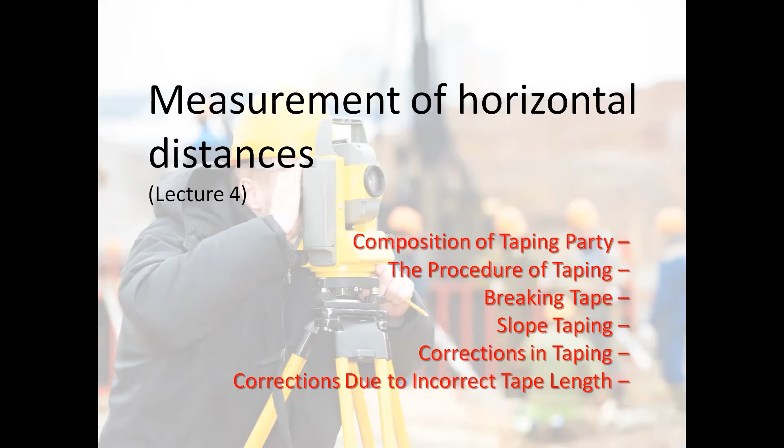So to review, the composition of the taping party are as follows. The head tapeman, the person responsible for the accuracy and speed of all linear measurements using the tape. Then the recorder, he keeps records of all the measurements, sketches, and observations taken during the process of measurement.

The flagman is the person whose duty is to hold the range pole at selected points, especially in traverse, in every corner where sightings can be taken; the flagman will serve as the target of the instrument man. Then we have the rear tapeman, the person whose duty is to assist the head tapeman during the taping operations.

So for the taping party, basically ito lang ang kailangan natin. But for a survey party, so marami yun. Na-discuss natin on the previous lecture. So we have the chief of party, etc., etc.

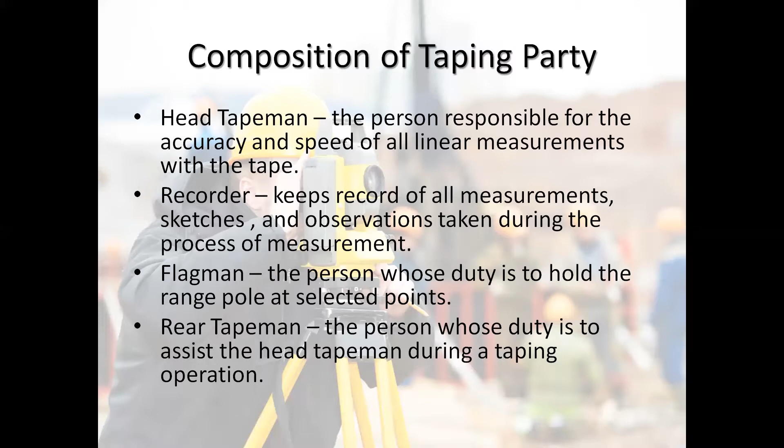So the procedure of taping. So basically, ito yung gagawin natin pag we are on field doing measurements. Aligning the tape. I-align natin ang tape according to the terrain. Then stretching the tape. Dapat the tape should be properly stretched. Hindi masyadong stretch, baka maputol ang tape. Ang hindi rin ganong maluwag, or at least can have a more accurate measurement.

Plumbing, this is done when you are measuring a tape held horizontally along a sloping area. Plumbing, or sa Bisaya, is pagtuntun. Maglagay ka ng tuntun so as to have an accurate measurement based on the end where the tape was broken. Then marking full tape lengths, tallying tape measurements, and then measuring fractional lengths.

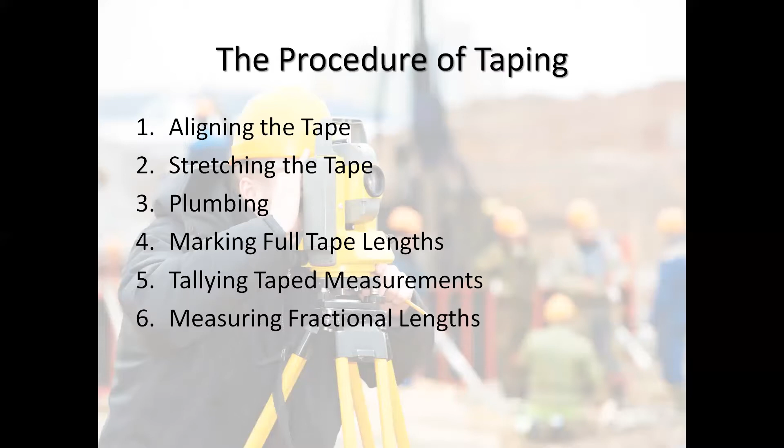You see fractional, you are not stretching the whole tape during the aligning, during measurements. So this is what we call the breaking tape method. Breaking tape, hindi ibig sabihin that we have to cut the tape, but basically to stretch out the tape based on the horizontal plane.

For example, this is the sloping terrain, and you are to measure the length from point A to point B. If you are going to align the tape along the terrain, what you are measuring is not the horizontal distance, but the slope distance. To measure horizontal distance, you can do breaking tape method or slope taping method, and later on convert it into corresponding horizontal distance. But for this discussion, we'll be using the breaking tape method.

So in breaking tape, ibig sabihin, iputol-putol natin yung tape based on the mark on the tape measured. For example, this is the direction of the taping party going down slope. So on the 30 mark of the tape, you are stretching the whole tape now. If you are using a tape that is 30 meters in length, you are already stretching out the tape towards the 30 meter mark.

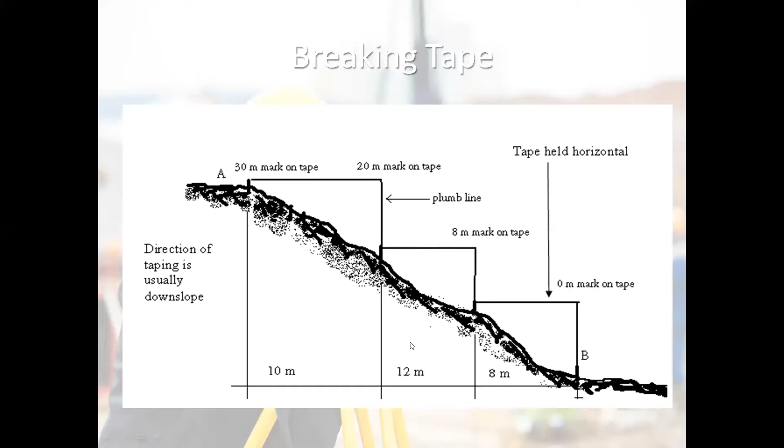Understood? Sa kanila, baliktad, ano? But pwede rin natin gamitin ganito. From 0, you measure towards the horizontal distance, then until kung ano lang ang kaya, then you record your reading. Pwede rin pabaliktad. But on the book, ganito yung ginagawa nila: from a 30-meter mark towards 0. And pwede rin gawin from 0 towards the 30-meter mark.

That's breaking tape method. For slope taping, I think we already have discussed this one. We simply have to convert the slope distance into horizontal distance by applying trigonometry. We have to determine the angle of inclination. So this can be done by using clinometer. You determine the angle and then measure the length from one point to this point along the terrain.

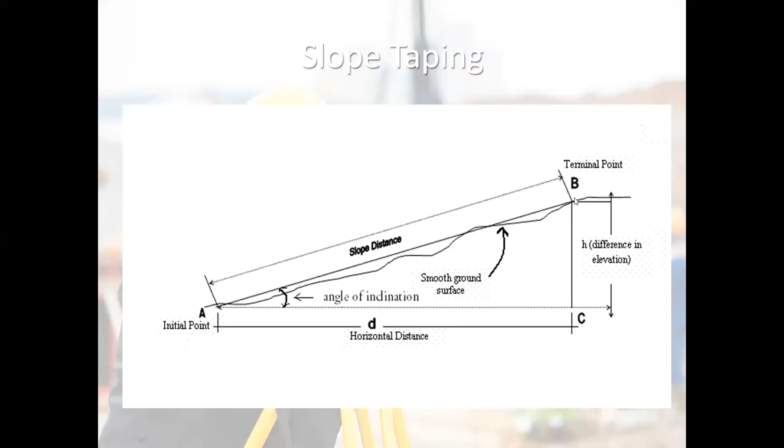For example, the measurement is made along a line that is inclined, a vertical angle of 15 degrees and 25 minutes as measured using handheld clinometer. Now, hand level and clinometer. The slope measurement is 756.52 meters, medyo mahaba. What is the corresponding horizontal distance?

Solution. So based on our previous discussion, the horizontal distance, or D, can be computed using the equation D is equal to S, which is the slope distance, multiplied by the cosine of the angle. If the inclination is given as an angle, you can solve it directly. 756 times the cosine of 15 degrees and 25 minutes.

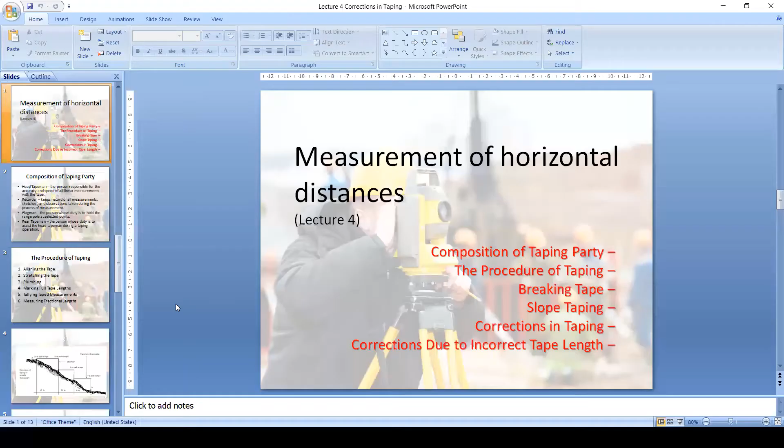So in your calculator, you enter, skip ko muna, 729. And then, stop share ko muna. And short video. So in your calculator, I hope you can see this one. Okay, let me check. Okay.

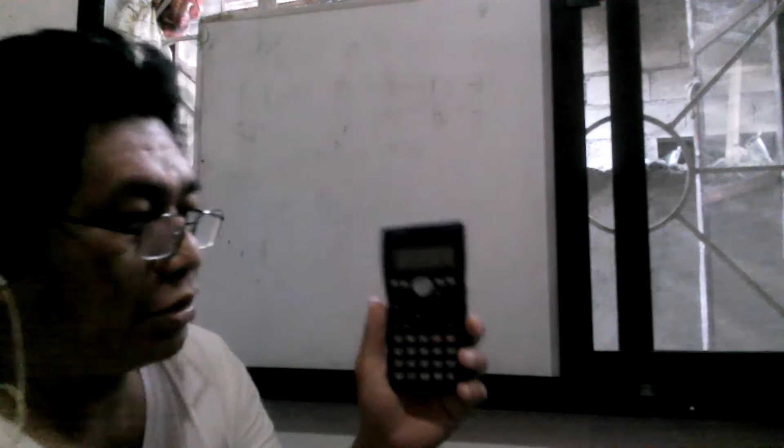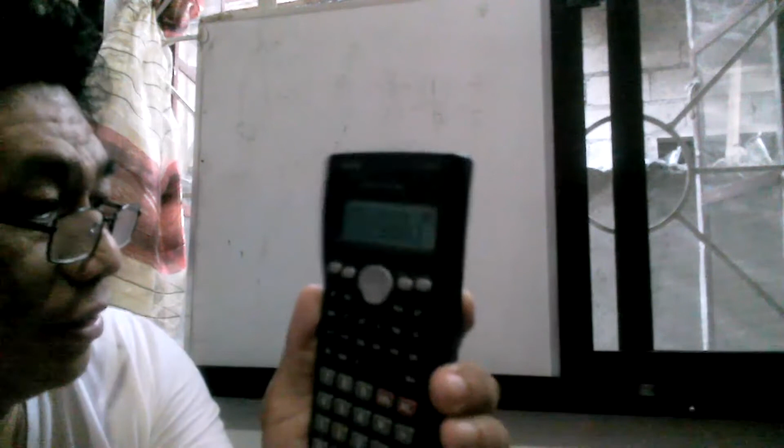So in your calculator, you enter the slope distance, 756.52, multiplied by the cosine of the angle, press 15 degrees and 25 minutes. Press the equal sign. This is 729. Let me see. It's not clear. 729.22 or 0.3. What's my answer here? 729.30 meters.

So, video muna. And then share again with the screen.

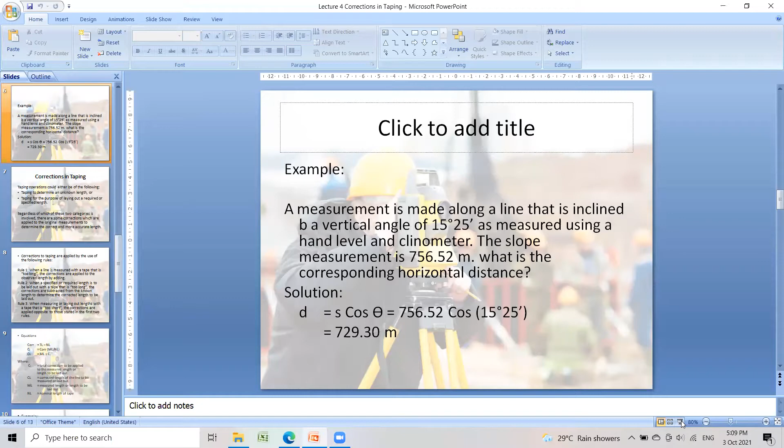So you can multiply it directly using a scientific calculator. As a reminder always, before answering the quizzes, you have to have your scientific calculator. Actually, on a face-to-face class, I do not allow the use of equations or formulas. You have to familiarize the equations. You have to memorize the formulas. But since this is online, we cannot really look into if you are memorizing the formula. At least be ready na lang.

Print all of these handouts before attempting a quiz. And in the quiz, I will allow you to use your handouts, provided that it is your own handout and you do the computations on your own, not depending on your classmates with the results, because at the end of the semester, you will learn nothing, no? Okay.

So I think we'll discuss na natin later on. And if ever the angle is given in terms of a slope, that is in percentage, 45% or 20%, you can use the equations provided based on our previous discussions. Convert that percent or slope into an angle before doing this equation. Understood? Okay, let me proceed.

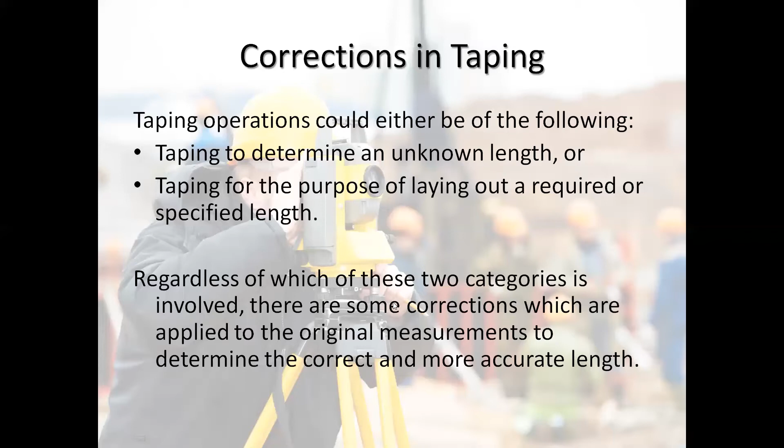The corrections to taping are applied by the use of the following rules. So we have 3 rules. When a line is measured with a tape that is too long, the corrections are applied to the observed length by adding. When a line is measured, you are determining with a tape that is too long.

When we say too long, you have a tape bought in a hardware, that's 30 meters. But if you compare that 30 meters with the standard invar tape or invariable tape, you found that the tape you have bought is longer than the standard tape. That is why it is too long. So the corrections are applied to the observed length by adding. You add your corrections based on your computations to your measured tape length.

For rule 2, when a specified or required length is to be laid out, i-laid out nimo, ibutang nimo on the ground with a tape that is too long, the corrections are subtracted from the known length to determine the corrected length to be laid out. So when measuring or laying out correct lengths with a tape that is too short, the corrections are applied opposite to those stated in the first 2 rules.

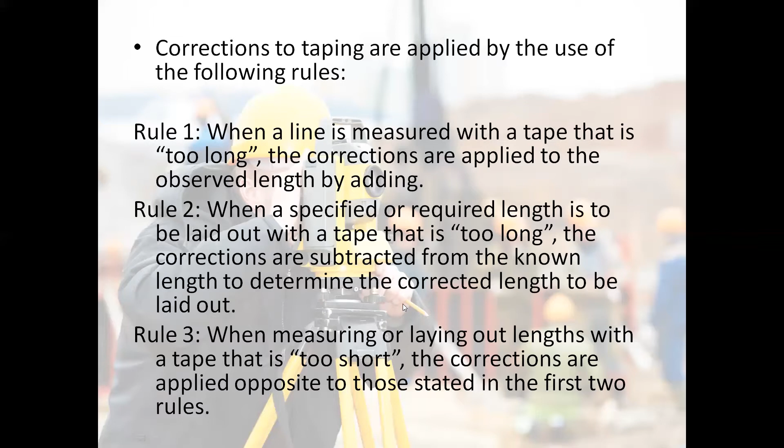So if too short, for rule number 1, if you are measuring a line with a tape that is too short, then instead of adding, you subtract. For rule number 2, if you are to lay out a specified or required length with a tape that is too short, the corrections are to be added. So baliktad siya. You memorize these 2 rules and we will apply them in the following examples.

Corrections are computed as TL minus NL. TL is the tape length used for measurement, and NL is the nominal length, the supposedly correct length of the tape. Then C sub small l, the corrections, is the correction multiplied by the measured length divided by the nominal length. Then CL, the correct length, is the measured length plus or minus C sub l. ML is the measured length or length to be laid out, and NL is the nominal length of the tape.

Claro? Okay. Question? Wala question. Let me proceed. So we will provide an example for the equation.

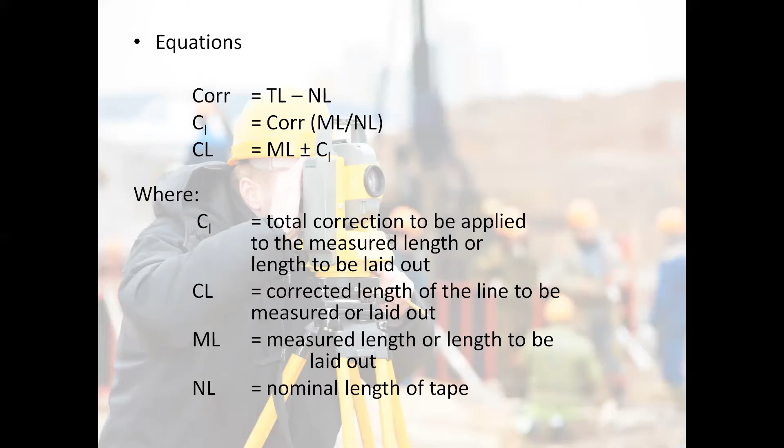Example: the length of line AB measured with a 50-meter tape is 465.285 meters. When the tape is compared with a standardized invar tape, it is found to be 0.016 meter too long under almost the same conditions of support, tension, and temperature that existed during measurement. Determine the correct length of AB. Given, the nominal length is 50 meters, the supposed correct length of the tape.

Measured length is 465.285 meters, and there is an error of 0.016 meter for every 50 meters. The correction to be applied: C sub l equals the correction times the measured length over the nominal length, so 0.016 multiplied by 465.285 over 50. Using your calculator, the correction to be applied is 0.149 meter.

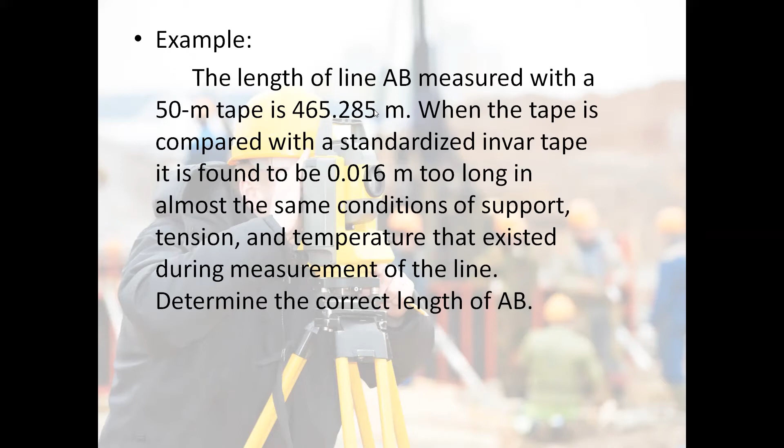For the correct length, this is 465.285, the measured length, plus or minus 0.149. Here we use plus, because the tape is too long and the process is determining the length of that line. That is rule number 1: to determine using a tape that is too long, the correction should be added. So the correct length of line AB is 465.434 meters.

So nasabtan. So why is this important? Yun naman. So in surveying, isang gamay lang na difference on the correct length, dako na siya og difference, especially if the property you are buying is very expensive. Like for example, you are buying a property in Filinvest. So the value of that property per square meter is mga 10,000 ang value of land per square meter.

And then if you are using a length that is of incorrect length, so pila ka millions ang imong alkanse, no? If you are using a tape that is either too short or too long. So that's the importance of the corrections.

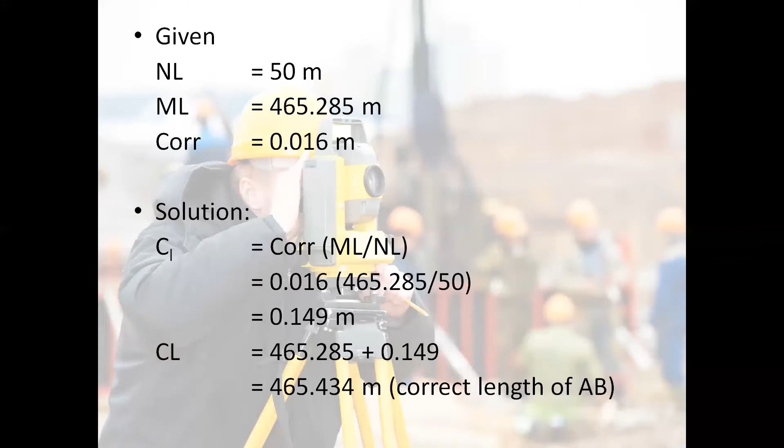Okay, let us proceed with exercise number 1. A steel tape whose nominal length is supposed to be 30 meter long. So this is the NL. Was found to be 30.02. So ibig sabihin, the tape is longer. So nominal length is 30 meter, pero it was found out to be 30.02. So it's 0.02 longer with the standard when compared with the invar tape during standardization.

If the rectangular lot measured with the tape was recorded to be 220 meter by 450 meter, what is the actual dimensions of the lot? So determine the error in square meter. So we have to compute magkano o ilan yung sobra in terms of square meter based on the previous record, recorded 220 meter by 450 meters. Okay, to be continued. That's end. So we will solve this exercise.

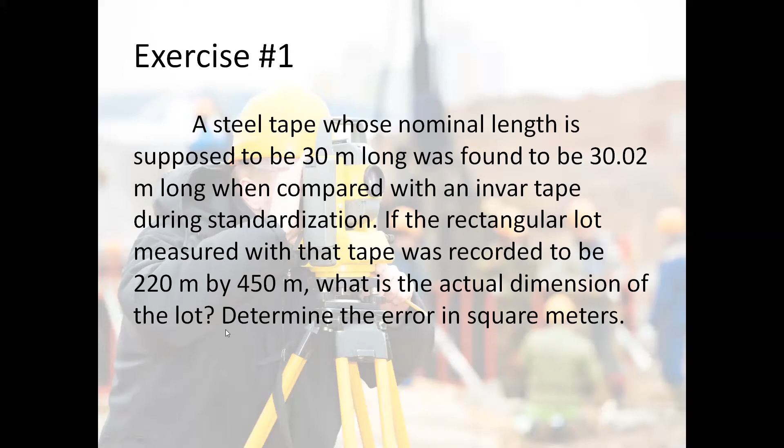Let me stop share and start the video. Klaro ba? Let us try to solve this problem. Okay.

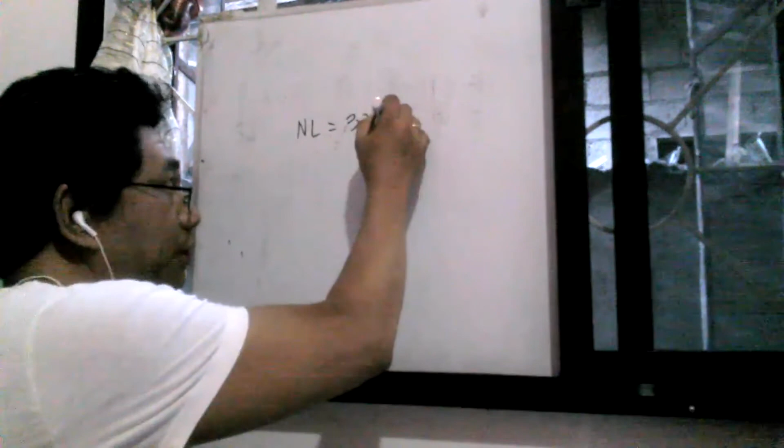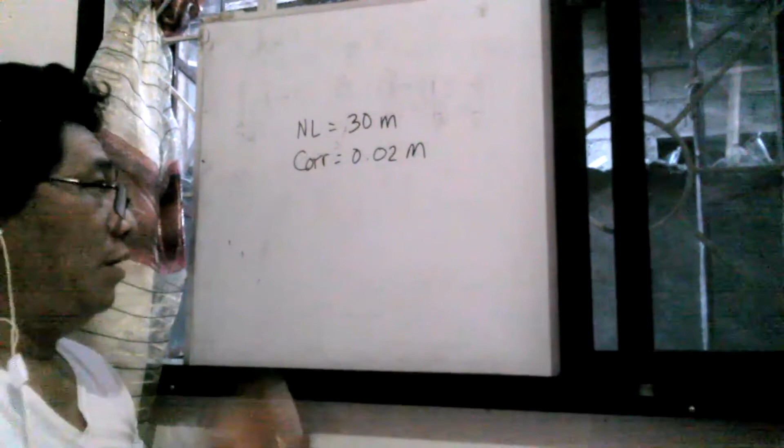We have a steel tape that has a nominal length of 30 meters. Pangit yung again. NL is 30 meters. Then correction, it was already given. The correction is 0.02 meters. Ibig sabihin, it is longer. The tape is longer than the nominal tape by 0.02. Then the width of the property is 220 meters and the length is 450 meters.

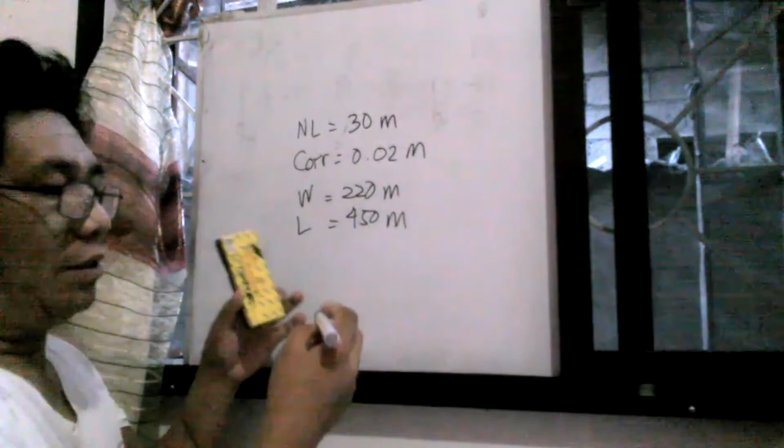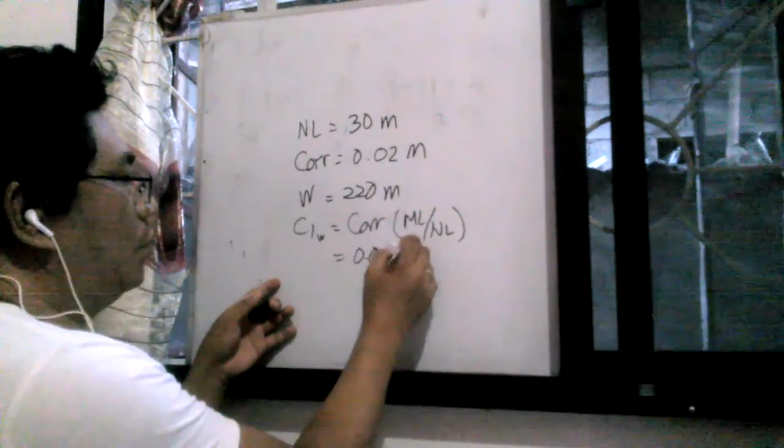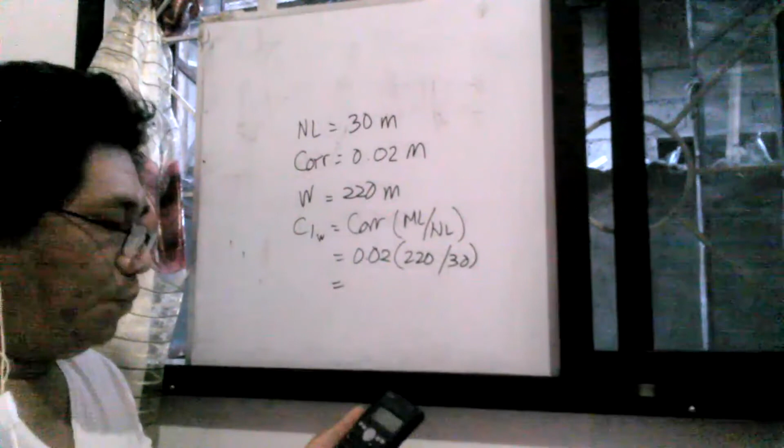Whiteboard marker. So let us first solve the width. For the corrections to be applied on the width, it is computed as corrections multiplied by the measured length over the nominal length. The correction is 0.02 multiplied by measured length of 220 over 30 meters. Again, using our calculator, let us compute 0.02 times 220 divided by 30.

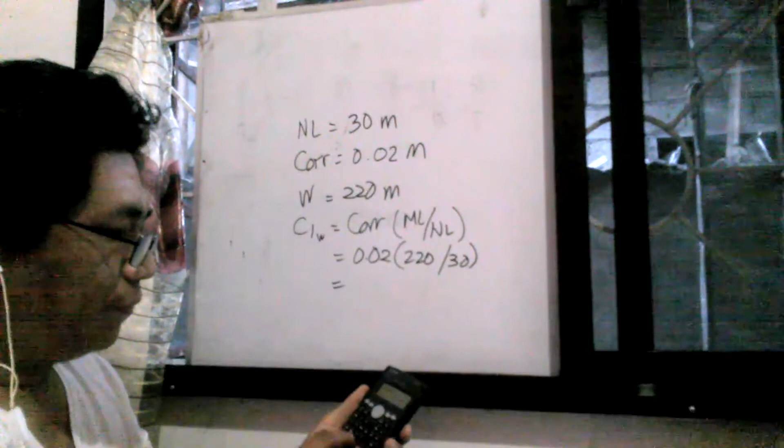So you have a correction to be applied of, say, this is 3 decimal, 0.147. It was 0.146666. So it's 0.147 meter. So the correct length for the width is equal to 220 plus or minus the 0.147 meters. Since you have to determine the actual length, and the tape is too long, so correction should be added.

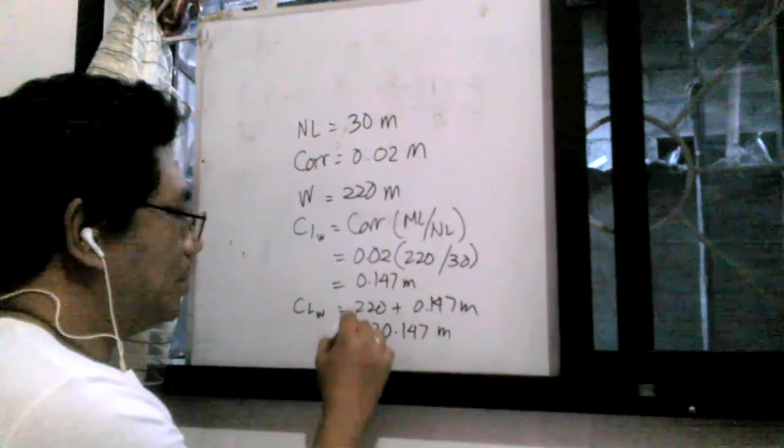So the correct length is 220.147 meters. So this is the correct length of the property. So let us put here the correct length of the width is 220.147 meters. Okay? Maklaro ba? Let me see my video. Okay, klaro.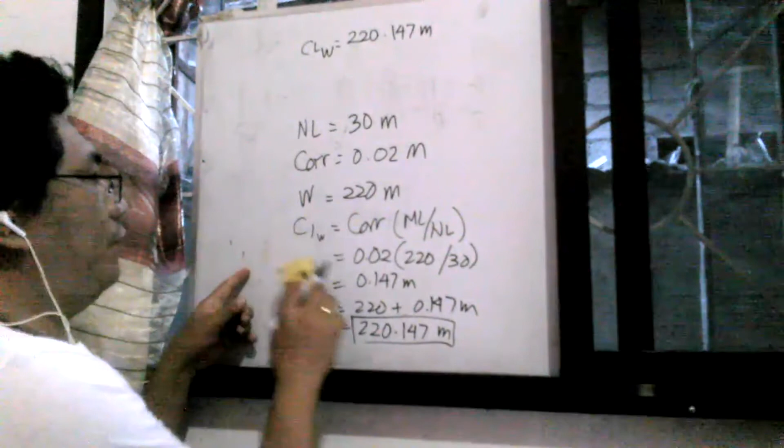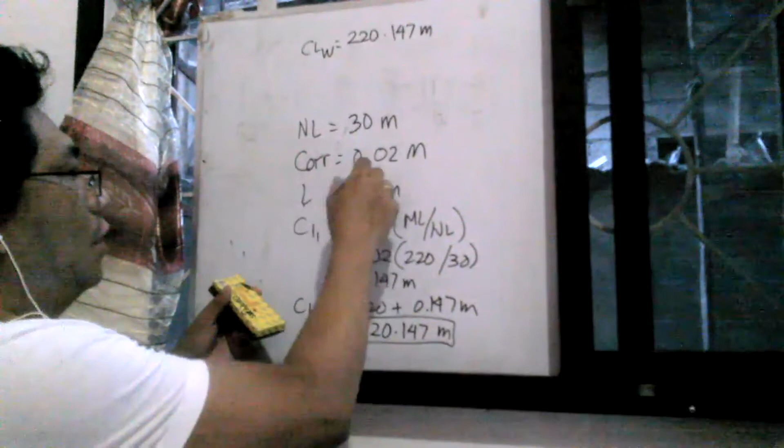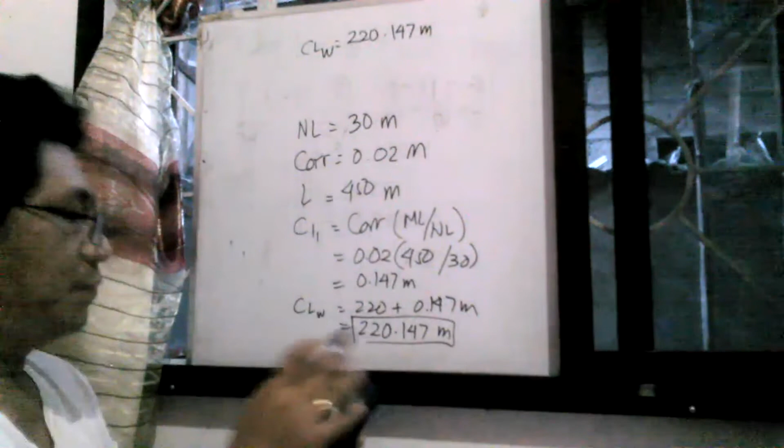Now let us compute for the length. The corrections of the length. Here we change the length. Ito, the length na to, width na kanina. Going back to the problem, it's 450 meters. So we will change this one into 450 meters. So using your calculator, you solve 0.02 times 450 divided by 30 is 0.3. So your correction is 0.3 meters.

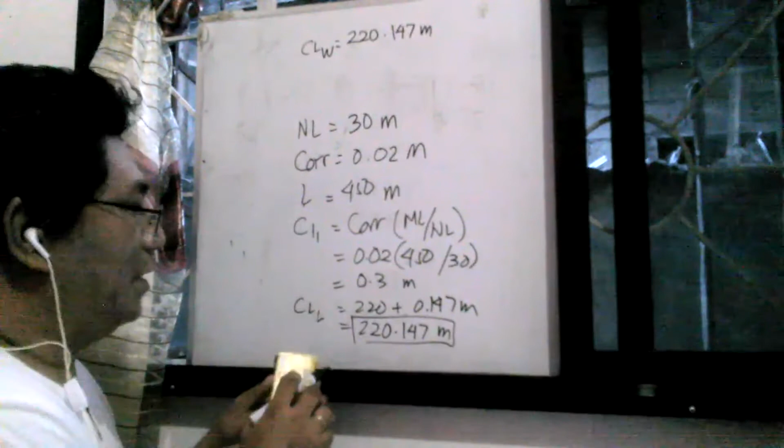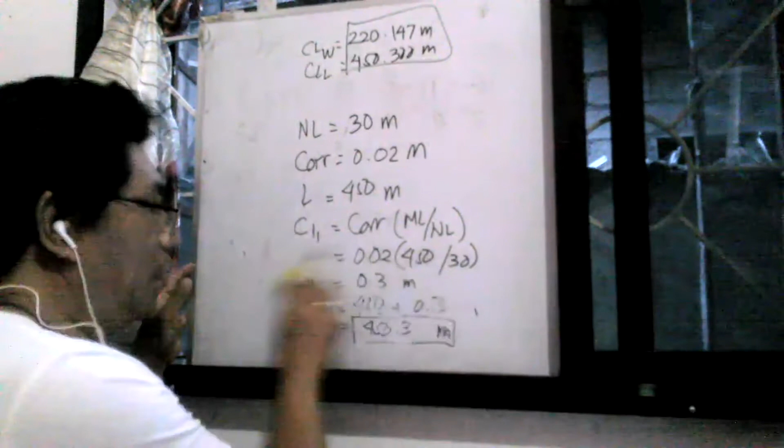So for the correct length of the length, this is 450 plus 0.3. So the actual length is really 450.3 meters. So this is the actual length of the property. So for the corrected measurement, the CL of the length is equal to 450.300 meters. So these are the answers. And then let us compute for the error in terms of square meter.

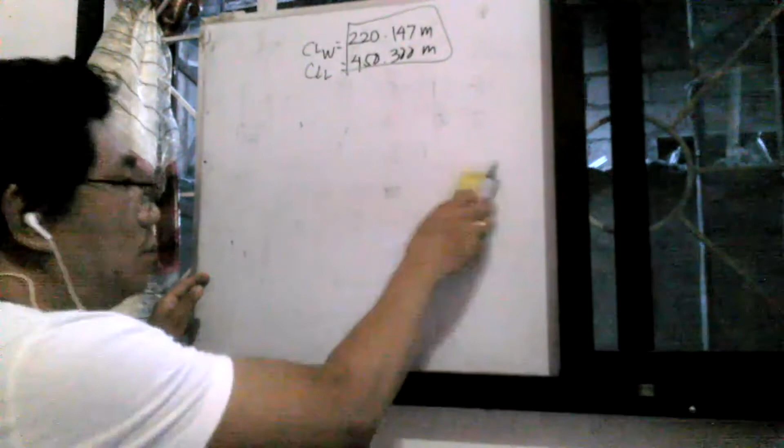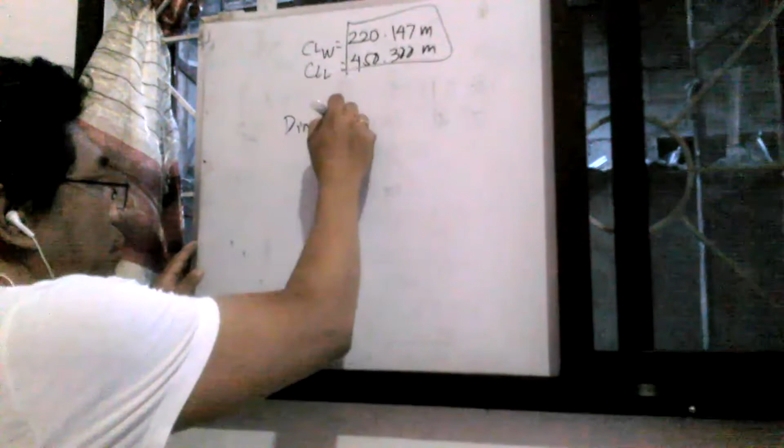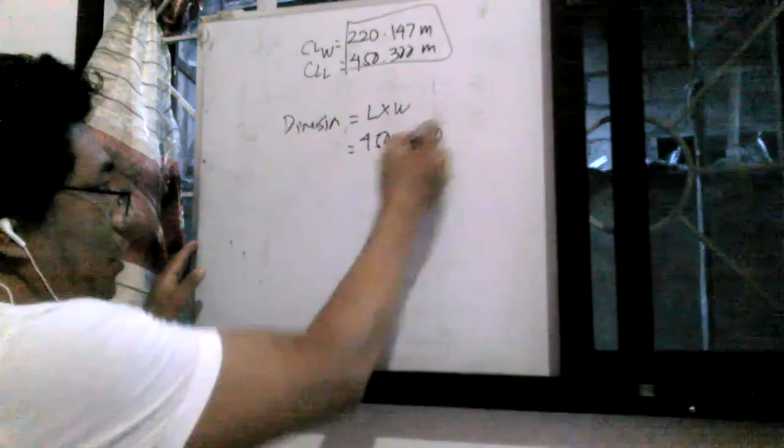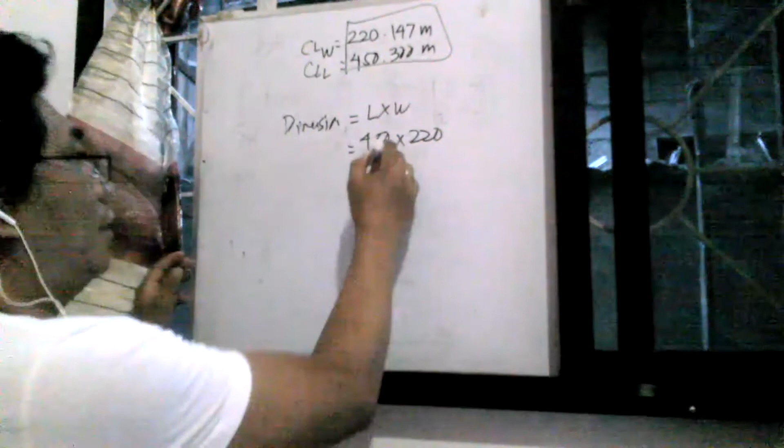So based on the required dimension of the lot, the area is equal to length times the width. Length is 450 times the width of 220. So the area of the property is 99,000 square meters. Again, 450 times 220, 99,000 square meters.

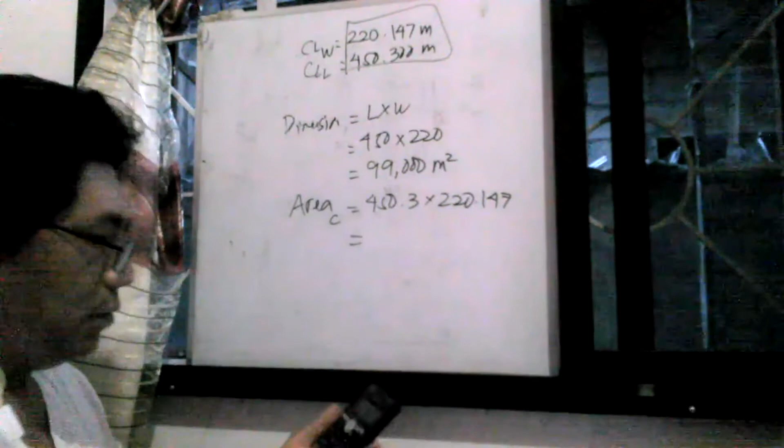But the corrected dimension, corrected area, this is corrected: 450.3 times 220.147. 450.3 times 220.147, this is 99,132.194 square meters. So what's the error?

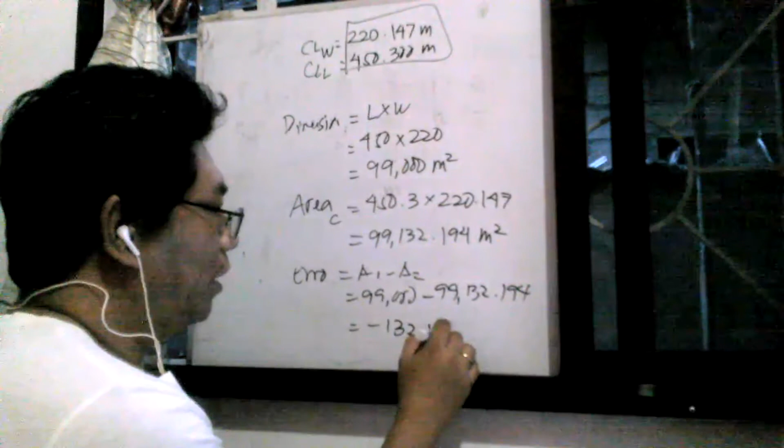The error is equal to area 1 minus area 2. This is area 1: 99,000 minus 99,132.194. So we have a difference of negative 132.194 square meters. So that's the difference, yeah. 132.194 square meters. So it means it is short. The surveyed area is short for you.

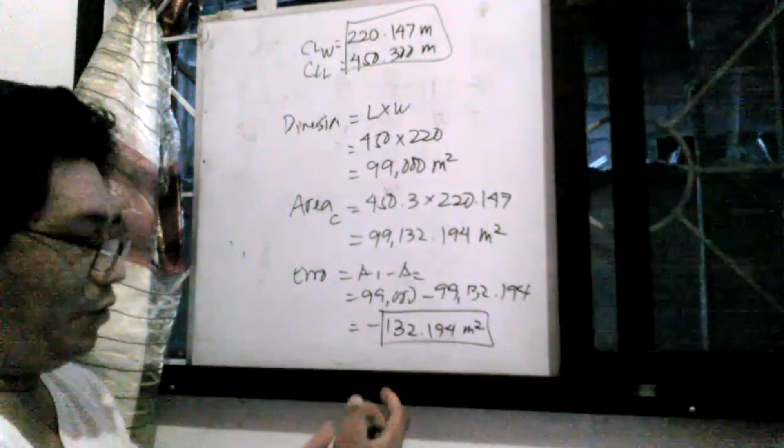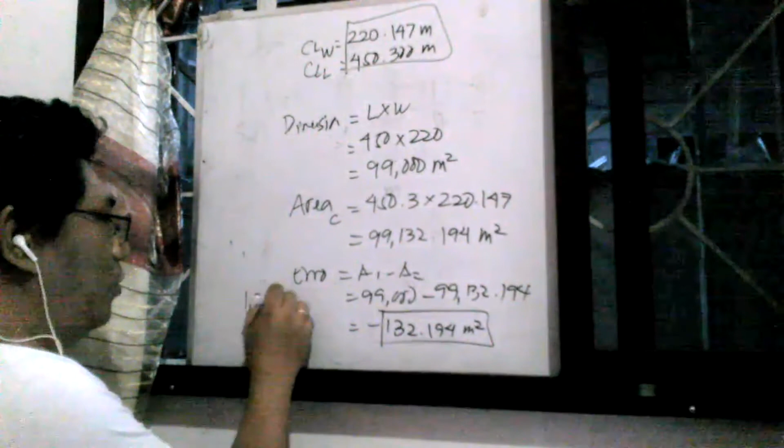How much did you lose? This is 1,321,194 pesos. So this is what you lost. So you fall short of 1,321,194 pesos for just 132 square meters if the value of land is only 10,000 in Butuan.

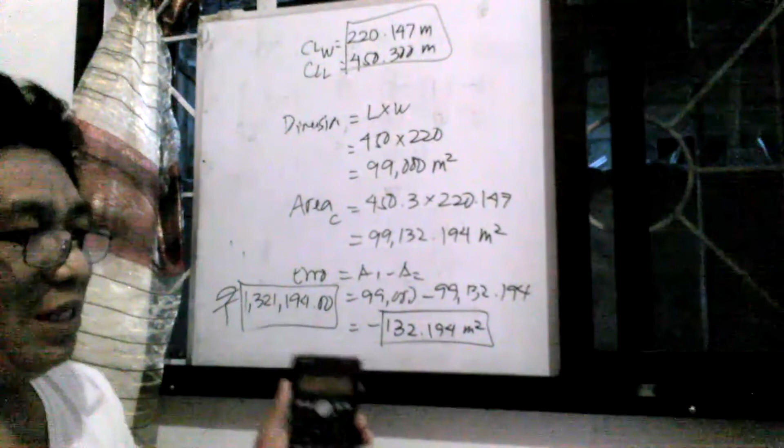If you are buying an agricultural land, the price of that is around 1,000 to 1,500 per square meter. So if it's only 1,500, 132.194 times 1,500 is about 198,000, or roughly 200,000. It's small, but still a big amount. Imagine 198,000, that's already big money.

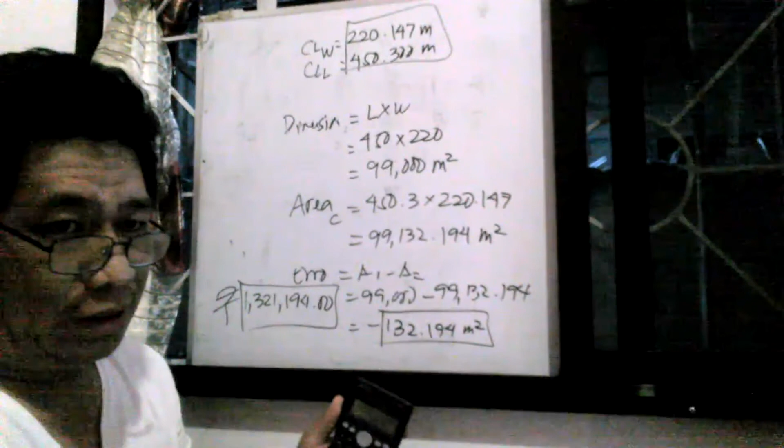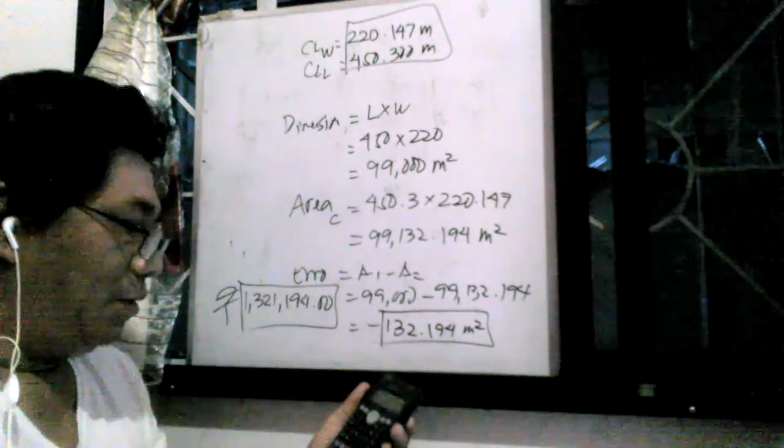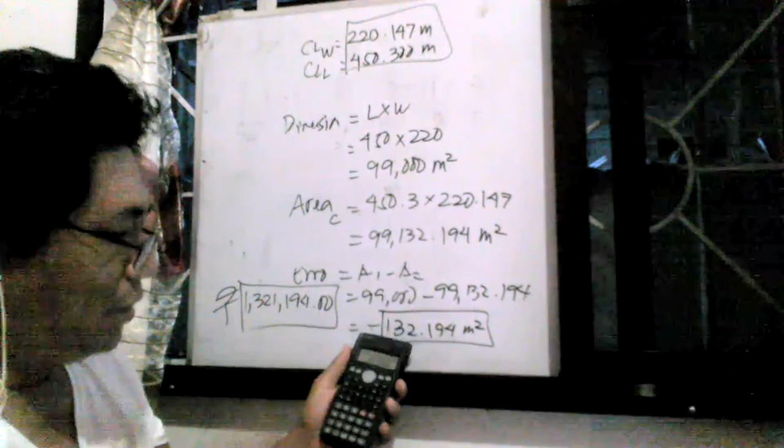If you are buying your property in Siargao Island, how much is the value of land per square meter? Any idea? Well, I have been to Siargao, and based on their assessment, the value of land there is 20,000 per square meter. So again, 132.194 times 20,000. How much is the value of the land you lost? 2,643,880. So, very significant.

That's why when you do surveying, there is no room for errors and mistakes, because that will amount to a big value. Although it's small, if you look at the data, this is the only difference: 0.147, smaller than a meter. The difference is small. And here, 0.3, this is only 30 centimeters of error. But if you compute the land area, it makes a big impact, a significant difference, and will equate to millions of pesos. That is why it is very important to apply corrections in taping.

Okay, that's all. I think you got why it is necessary to apply corrections in taping.

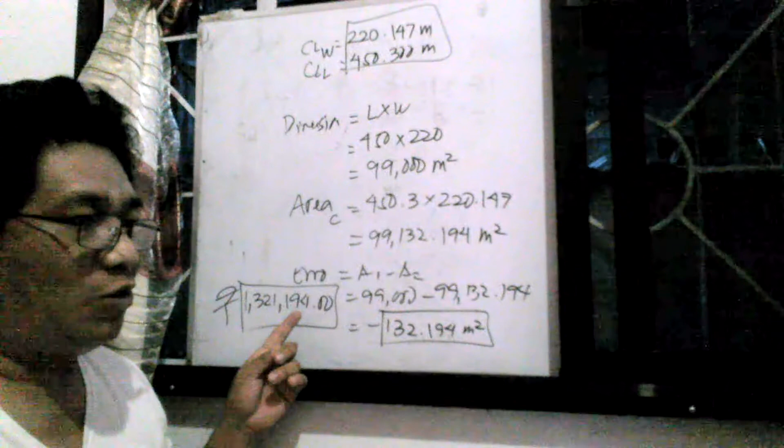Okay? Here is the plan. Got it? So for your answer, this will be the difference. This is the error that we have to compute. You have a difference of 132.194 square meters. If the question is about value, this is the amount of lost money that was not considered if you do not apply corrections in taping.